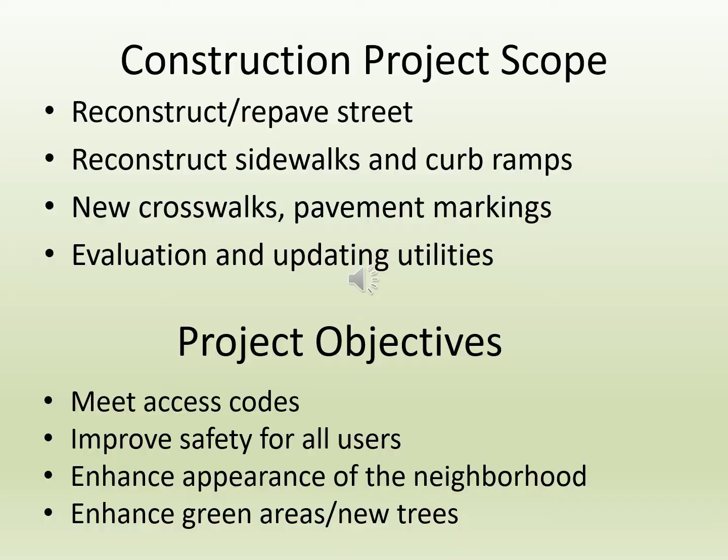The City Council adopted a Complete Streets policy in 2016. The goal of that policy is to design streets to enable safe access for all users regardless of age and ability. Vision Zero is another important policy you may hear about. The City Council adopted a Vision Zero policy in 2016. Vision Zero calls for the elimination of fatalities and serious injuries resulting from traffic crashes, and the city is very committed to this goal. In addition to Complete Streets and Vision Zero, the city has several other policies and plans that form the basis of our approach to street reconstruction.

The Cambridge Growth Policy and Vehicle Trip Reduction Ordinance places an emphasis on sustainable modes of transportation to promote livability, improve air quality, and reduce gas emissions. The city's pedestrian plan, bicycle plan, and transit plan emphasize improvement, safety, and operation for sustainable modes of transportation. Their goal is to provide a transportation system that is sustainable and efficient and moves people safely.

The Cambridge Climate Plan and recently completed Urban Forest Master Plan document our commitment to maintaining a healthy environment in the face of a changing climate. These plans include specific steps we can take to slow down climate change by lowering greenhouse gas emissions and help us reduce impacts of climate change. For example, providing increased tree canopy to reduce impacts of increasing heat waves.

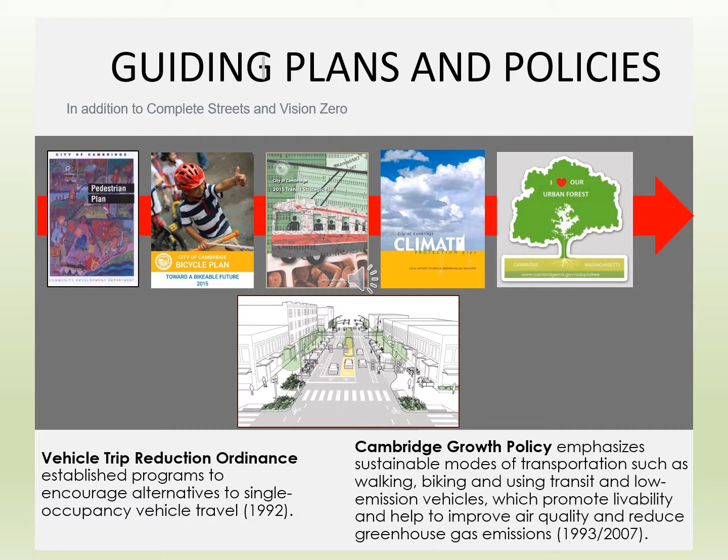So how do all of these plans and policies translate to specific street and sidewalk designs? Let's go through some of them, starting with accessibility. Why is accessibility important? First, it's the law. Both federal and state regulations cover the construction of sidewalks and require newly constructed sidewalks to be accessible. And two, more importantly, it's the right thing to do. We want our sidewalks to be as inviting and usable as they can be for people of all ages and abilities, such as people using wheelchairs, walkers, or pushing strollers.

What is required to make a sidewalk accessible? We typically think about the condition of the sidewalk. Is it smooth, or are there trip hazards or other impediments to people using mobility devices? We also think about the cross slope of the sidewalk. How steep is it, or how steep is the sidewalk that goes across driveways? As we are reconstructing sidewalks, we need to identify and address these deficiencies.

At existing pinch points, the city is required to provide 36-inch clearance to meet accessibility requirements. Where this is not possible, the city must provide a 48-inch accessible path around the existing pinch point. This slide includes some of the basic design tools we use to achieve accessibility.

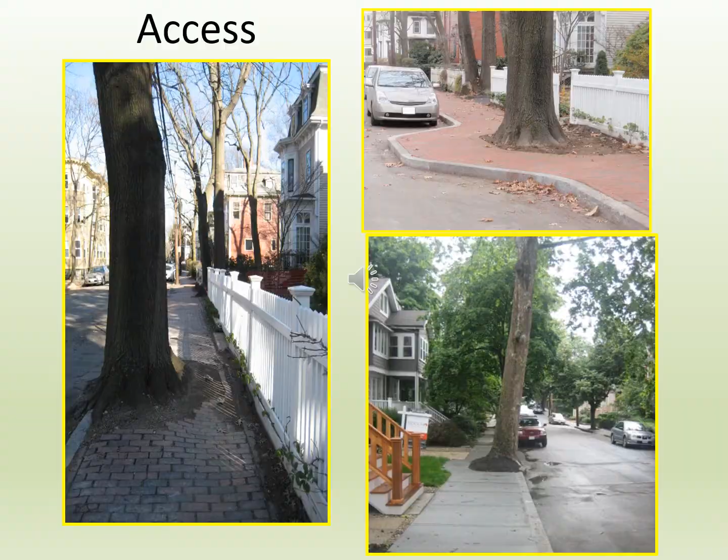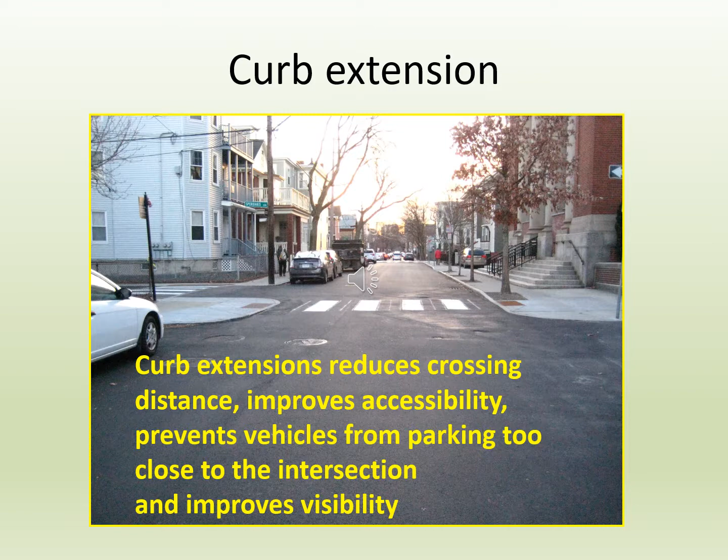Another pedestrian safety improvement is the implementation of curb extensions. Curb extensions reduce crossing distance, improve accessibility, prevent vehicles from parking too close to the intersection, and improve visibility of both pedestrians and drivers.

Green infrastructure, or GI, is part of our efforts to improve the quality of stormwater before it is discharged from local drain pipes to the Charles River or Alewife Brook. GI refers to a variety of techniques which use natural processes, such as specially selected plants and soils, to promote infiltration of stormwater into the ground or to remove pollutants such as phosphorus from stormwater. The city has successfully implemented GI on a variety of roadway projects, ranging from major corridors like Western Avenue to residential side streets in West Cambridge. We are committed to incorporating these types of environmental improvements into smaller projects as conditions and space allow.

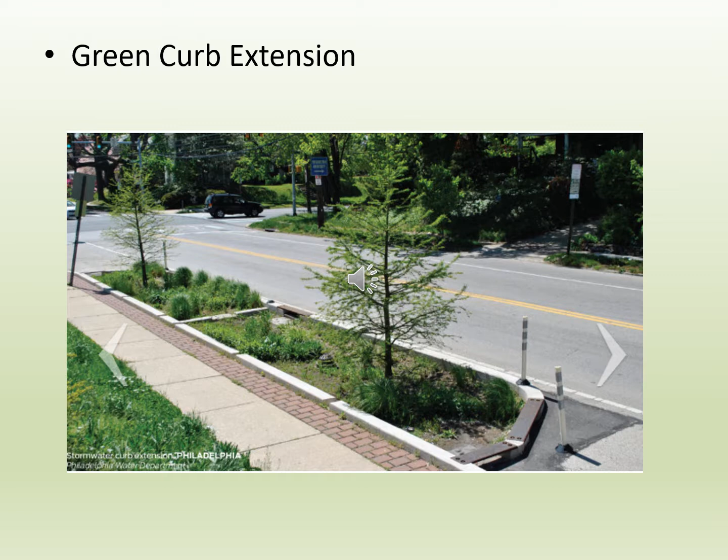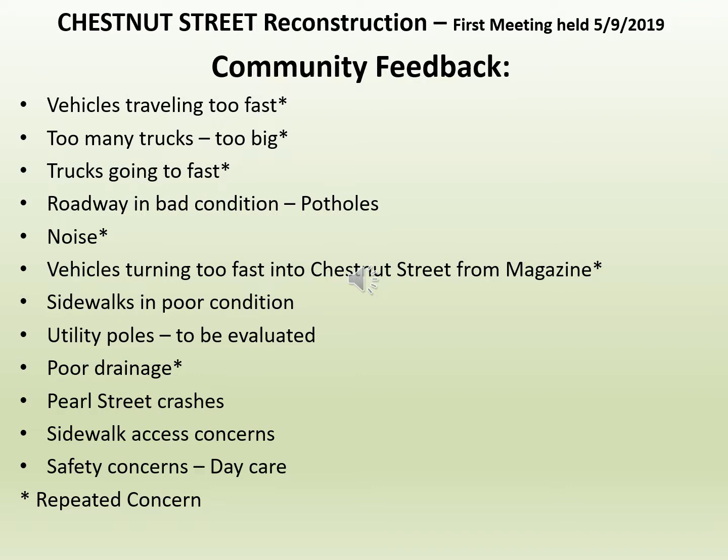The first community meeting was held on May 9, 2019. Residents provided feedback to city staff as listed on this slide. The second community meeting was held on February 11, 2020. Residents again provided feedback to city staff, including comments on the initial draft design developed after the first community meeting.

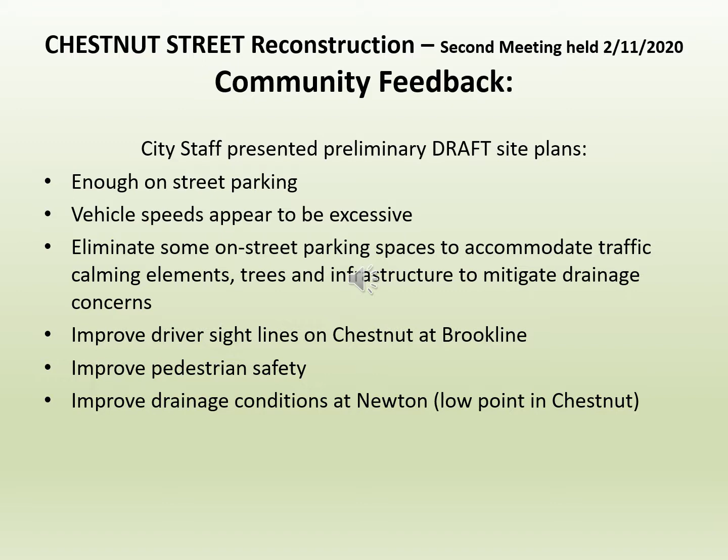How did we develop the draft plans we are presenting today? Here is a bit about the design process. First, community input, obtained from the first and second community meetings. Next, city, state, and federal policies. And third, we met with the fire department to discuss hydrant relocations.

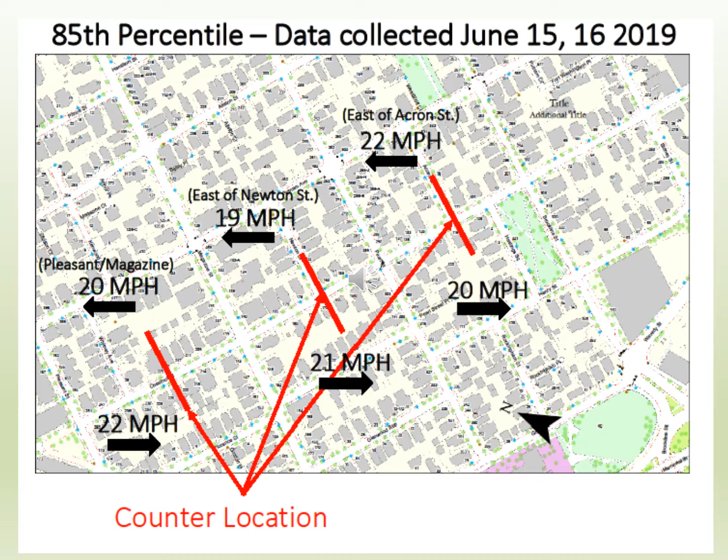On June 15th and 16th, 2019, the city collected speed data for Chestnut Street at 3 discrete locations. The next 4 slides present a color rendering of the proposed draft design for Chestnut Street.

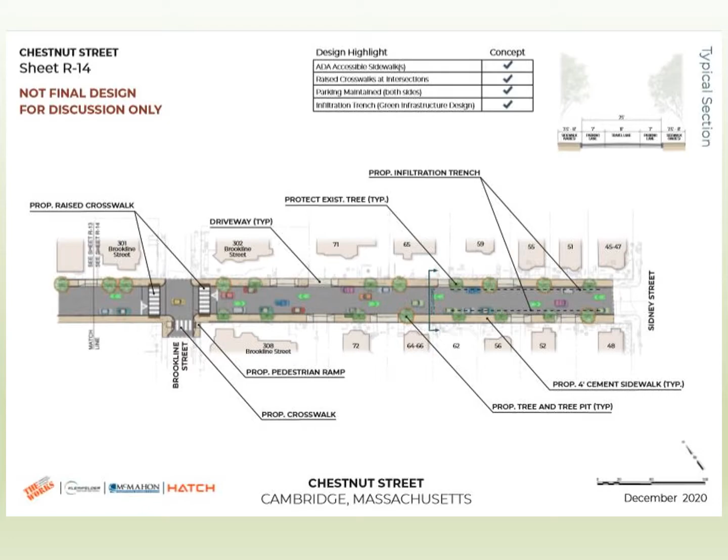Construction impacts are understandably what residents and businesses are usually most concerned about. Construction is disruptive, loud, sometimes messy, and frustrating. The city is committed to working with residents and businesses throughout the construction project.

Each project is assigned a project manager and a community relations manager. That team works with the contractor and with residents and ensures there is clear communication about what is going to happen, when it will happen, and what it will mean for neighbors, whether it's an annoyance like the temporary loss of a parking space or something more disruptive like a temporary water shutdown.

Projects in the city have standard working hours of Monday through Friday, 7 a.m. to 4 p.m. We expect our contractors to implement and maintain safe and effective traffic management plans to assist pedestrians, cyclists, and vehicles traveling through the project area.